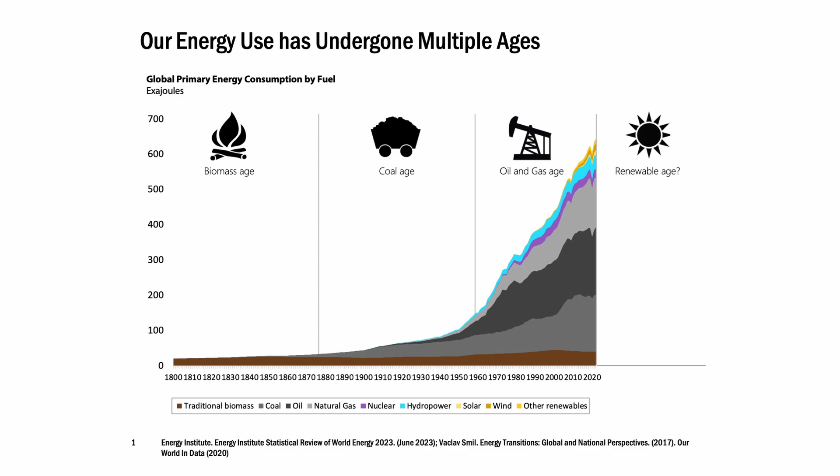So renewable energy resources, they make up a relatively small portion of our energy mix today, but they are the fastest growing. As you can see here, our global energy mix has gone through several phases, from biomass energy to coal to one dominated by oil and gas, and many believe that renewable energy is going to be the next energy age that we'll enter into, where renewable energy dominates our energy resource mix.

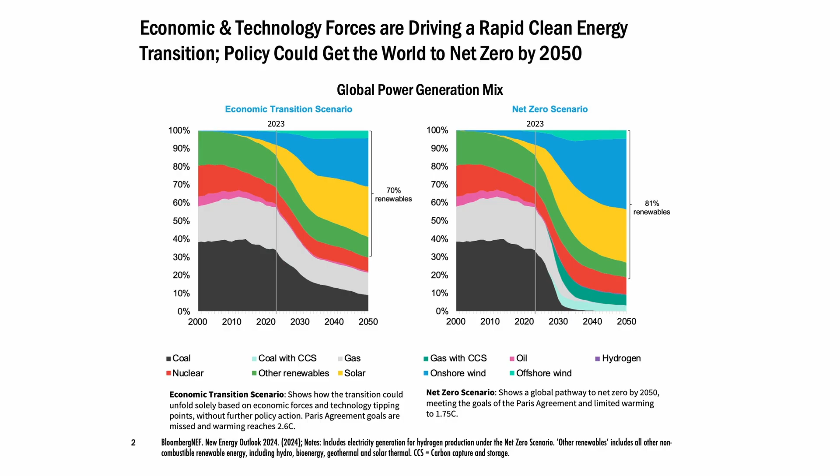This shows some global electricity forecasts from Bloomberg New Energy Finance, which is a reputable source, showing two different scenarios: a more conservative economic transition scenario and a net zero scenario, both of which you see really steep curves of renewable electricity adoption, again dominating our electricity and energy mix going forward.

So in this class today, we're first going to talk about what renewable energy is and what role it plays in our energy mix. And then we're going to walk through the renewable energy project development lifecycle. And in that process, you'll learn about the different technical and permitting and regulatory challenges that renewable energy projects need to overcome in order to get built.

So we hear the term renewable energy a lot, but what does it actually mean? What do you guys think of when you hear the term renewable? If used sustainably, I like that. Yeah, we'll talk about why it's important to think of depletability in terms of a spectrum. Generally, renewable energy resources are less depletable than their fossil counterparts, but they can be depleted.

Limited OPEX costs, yeah. Most renewable energy resources, like we talked about, you don't have to pay the sun to shine or the wind to blow, right? So typically lower fuel costs, but they often do have higher gathering costs, right? Because many times they're more site-specific. So gathering and transmission can be more expensive.

Less impact on the environment, yeah. Generally, renewable energy resources score higher on the environmental scorecard than their fossil fuel counterparts, but again, that's not always the case. That's great. So renewable energy resources encompass a wide variety of resources that are actually very diverse and don't necessarily have a ton in common.

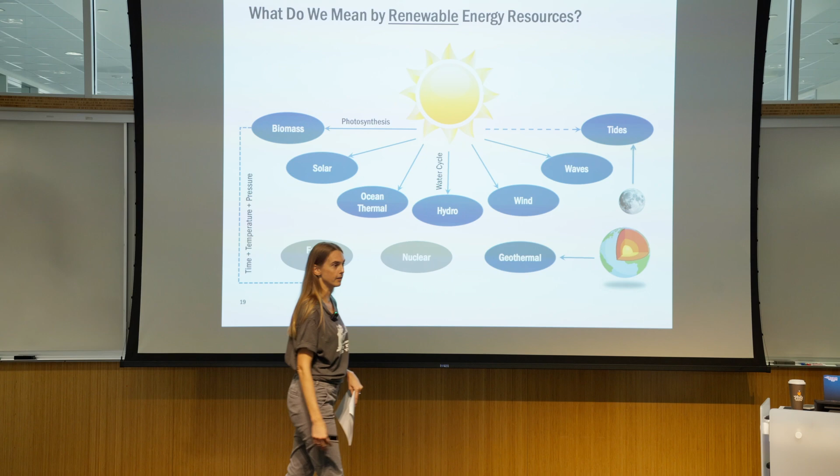Many think of renewable energy resources as non-depletable or inexhaustible, but as we talked about earlier, it's important to think about depletability in terms of a spectrum. Some of these renewable energy resources can be depleted faster than we can use them. So the lighter blue ones, hydro, geothermal, and biomass, are the resources that we would consider semi-depletable. For example, with traditional biomass, if you cut down a tree and burn it to generate heat, you can't use it again, right? And we have a limited biomass stock in the US and in the world.

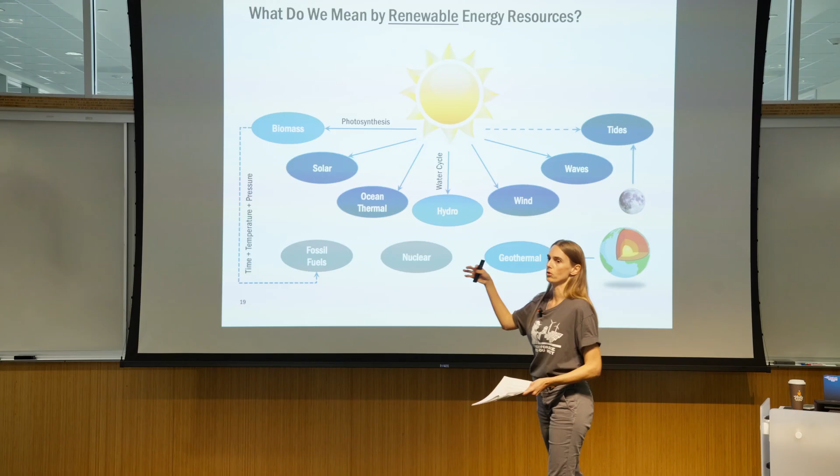Hydro can also be depleted. Once you take a water resource from up high and spin it through a turbine to generate electricity, that potential energy is gone, and you can't use it again unless you use energy to pump the water back up into the reservoir. Taking a step back, our hydroelectric resources can be depleted as a result of climate change, right, with the aridification of the Southwest and the Colorado River.

Geothermal energy, although heat from the Earth's core is not necessarily getting depleted, what is getting depleted is the heat transfer fluid that's bringing that heat from the Earth's core to the surface so that we can use it for electricity.

So water turning into steam and bringing that energy up. So that's one of the reasons why we see geothermal reservoirs' energy output depleting over time as that steam resource is getting depleted unless you actively replenish it. Then, of course, you've got the fully depletable resources in gray that take tens to hundreds of millions of years to form, and so are considered fully depletable on human timescales.

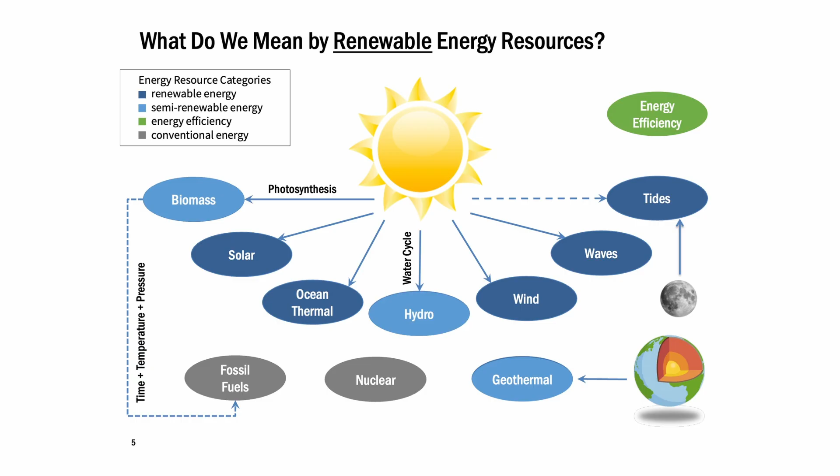The other energy resource, again, that we can't forget is energy efficiency, because the cleanest and the cheapest kilowatt hour or therm is the one that you don't use in the first place. But we often don't think about energy efficiency as a resource, right? But again, it is, in my opinion, the most valuable.

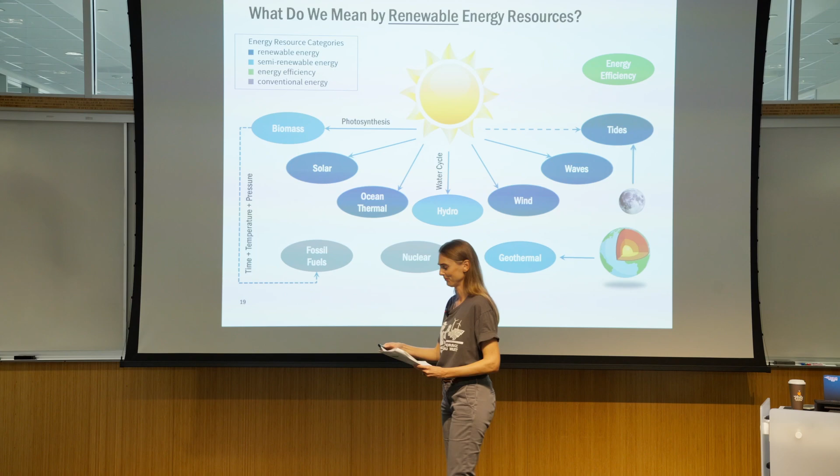In this course, we talk about three categories of renewable energy resources. The first is energy efficiency, which is a category in its own. Again, the cheapest and cleanest kilowatt hour or therm is the one you don't use in the first place. It's important to think about negawatts as a resource available to us.

The second category are the truly renewable energy resources, where use of those renewable energy resources doesn't deplete its source. So that's the wind, solar, and ocean resources. And then the third category are the semi-renewable energy resources, where if we don't manage use of those resources, we can actually deplete them. So that's hydro, geothermal, and biomass.

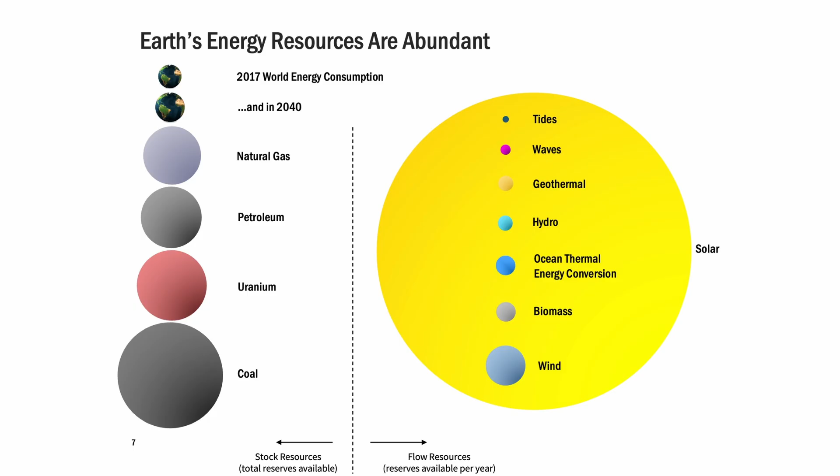I think in the US, the geothermal resource that's technically recoverable and available for us to harness is about 8% of our total electricity demand, whereas for the solar resource, that number is 75 times our total electricity demand. So huge variability there. And even though wind looks relatively small compared to solar, wind is more like 8 times our electricity demand. So still lots of potential wind resource available to harness that we haven't yet.

Our good old trusty LCOE chart shows us that there's also a lot of variability in terms of the cost of different renewable resources. Renewable energy makes up some of the cheapest electricity that we can build today, and some of the most expensive if you're talking about C&I or rooftop solar.

Renewable energy resources also have a commonality in that they can typically be more intermittent than other resources because they're dependent on the resource availability. So because of that, the costs that you see for renewable generation in the LCOE chart aren't necessarily reflective of the full costs for integrating those renewable energy resources into the grid. And those costs are kind of depicted, as you guys remember from the grid lecture, by the California ISO duck curve and the ramping needs of that curve.

And yet, because grid operators have a variety of different tools available to them to integrate renewable energy resources and balance supply and demand in real time, despite the challenges of those integrations, we have seen states integrate significant amounts of renewable electricity into their grid, upwards of 50% for states like Kansas, South Dakota, and Iowa that have a lot of wind electricity.

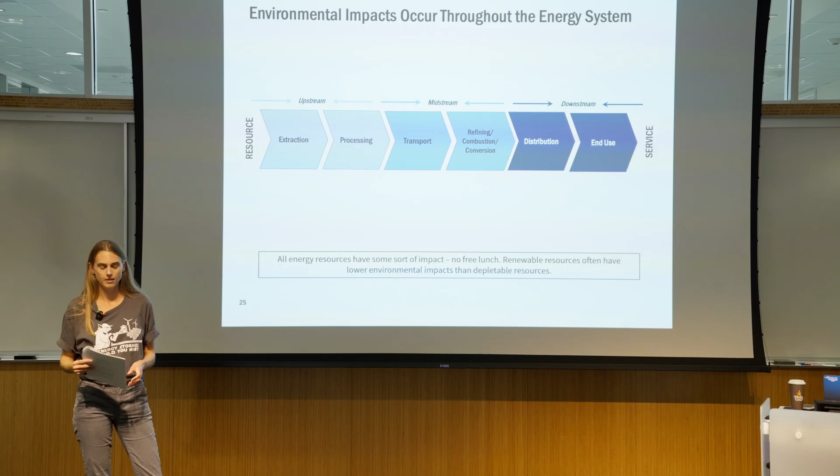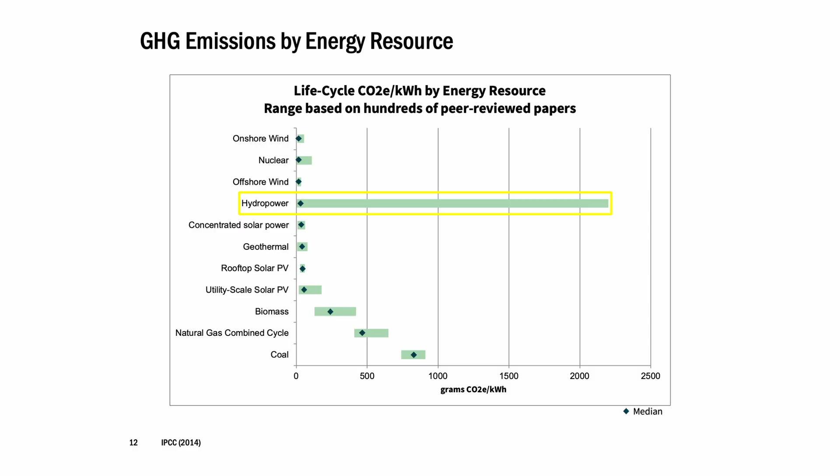Renewable energy resources also have a variety of different environmental impacts. They generally score better on the environmental scorecard. You've got the IPCC life cycle greenhouse gas emissions of different electricity generation resources here, where fossil fuels have relatively higher greenhouse gas emissions than their renewable energy counterparts. However, you've got biomass that can have pretty significant greenhouse gas emissions depending on the feedstock used, as well as hydropower that can have significant greenhouse gas emissions due to the flooding of reservoirs.

Again, you'll remember this from the environment lecture, but renewable energy resources make up some of the biggest water users, with geothermal, ethanol, and hydropower using the most water of any energy resource in the US.

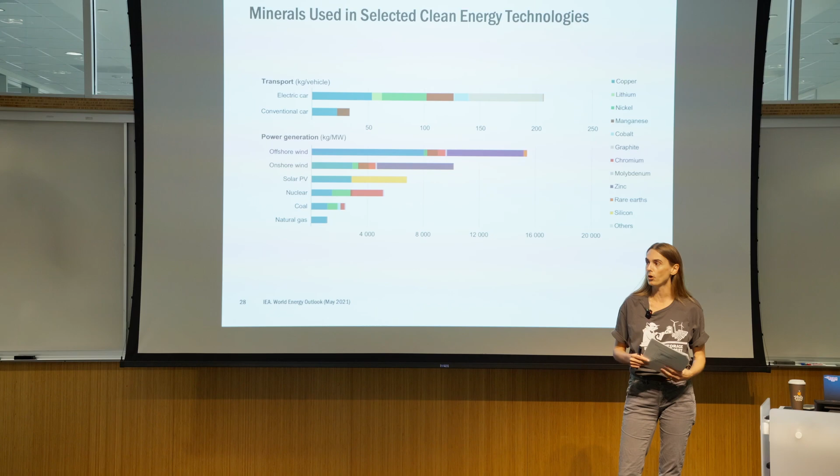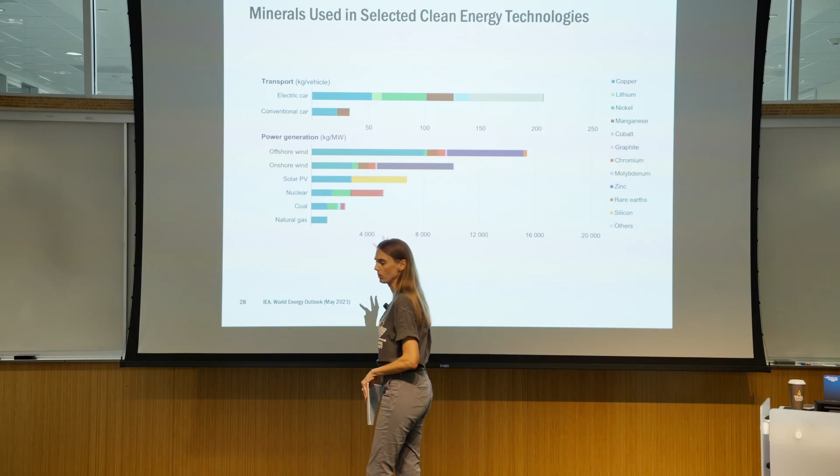And although clean energy technologies are less greenhouse gas intensive than their fossil fuel counterparts, they also typically use significantly more minerals, which require mining, and that mining process is fairly energy intensive, particularly for batteries, which, although they're not necessarily a renewable energy resource, are often paired with renewable energy resources to manage their intermittency. But at the end of the day, renewable energy resources are forecasted to make up a significant portion of our ability to solve climate change.

All right, so let's look at the role that renewable energy plays in our energy systems today. Renewable energy resources make up a relatively small portion of our energy mix, about 8 to 9% of our energy mix worldwide and in the US respectively, but a much bigger portion of our electricity mix, given that transportation currently doesn't make up a big portion of our electricity mix, and electricity is where the bulk of our renewable energy growth is happening.

And we know that the differential between the electricity mix and the energy mix is going to get reduced as we continue to electrify the transportation sector. So globally, traditional biomass is actually the biggest quote-unquote renewable energy resource that we use today, making up almost 7% of global energy consumption. And this is largely because in the developing world, biomass for cook stoves and heating is still used by about a third of the world.

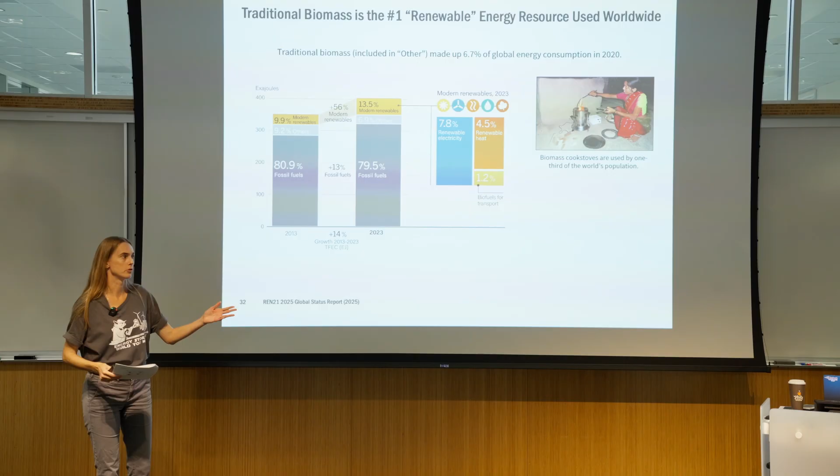But we don't always necessarily consider this a renewable energy resource because it's super dirty, it's bad for health, a huge driver of deaths as well in the developing world. And it's also hard to measure. So you don't always see traditional biomass measured in a lot of the charts that we show. It's shown in this REN21 chart here. It's included in the other category, which distinguishes it from the modern renewables.

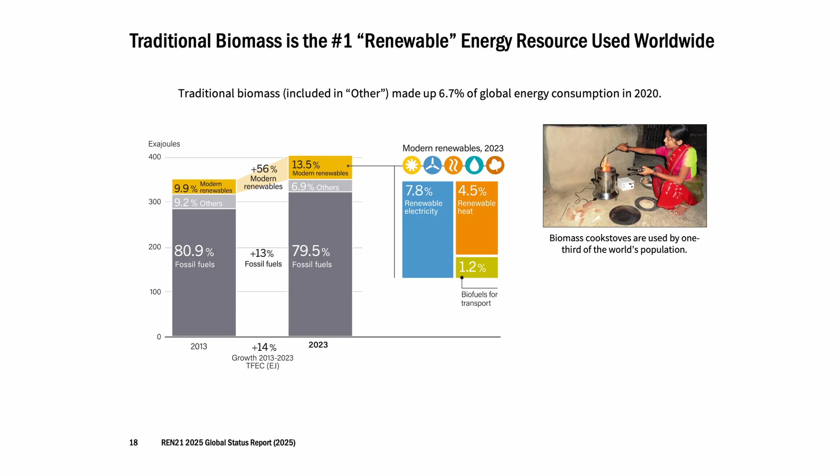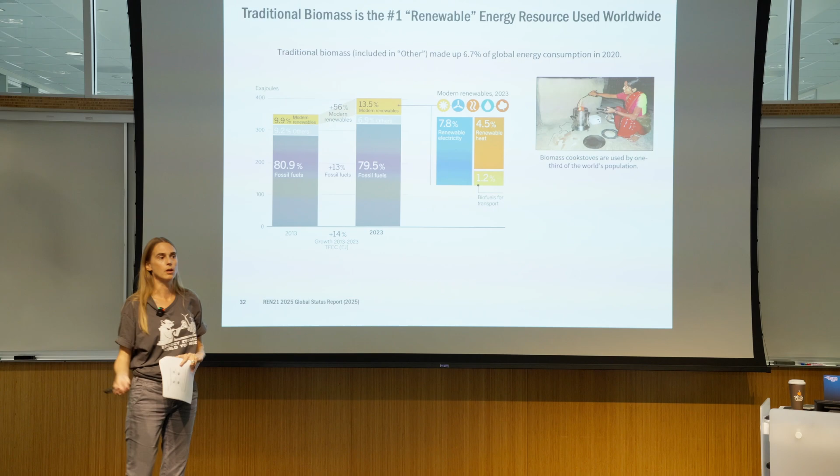But traditional biomass, I don't believe, shows up in our energy charts typically up here. But it is technically the largest renewable energy resource that we use today, and something you'll probably learn more about in the Developing World lecture. So even though renewable energy is still a relatively small portion of our energy mix today, it is the fastest growing, with wind and solar, which is what's driving the growth in other renewables here, making up the fastest electricity or energy resources from a growth standpoint.

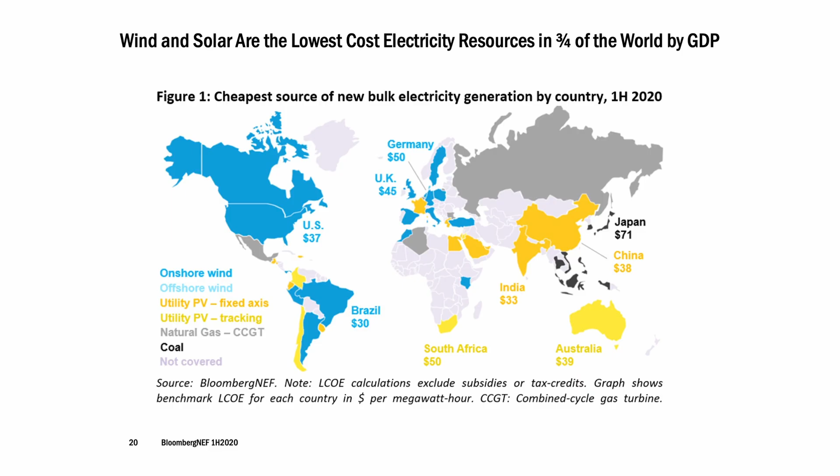And that growth is really being driven by those competitive economics of wind and solar. You saw in the Lazard LCOE chart that wind and solar, at least at the utility scale, are the cheapest electricity resources that we can build today. Those Lazard data, that's US specific, but we see that in other countries across the world as well, where wind and solar are the cheapest electricity resources that can be built in those grids and markets.

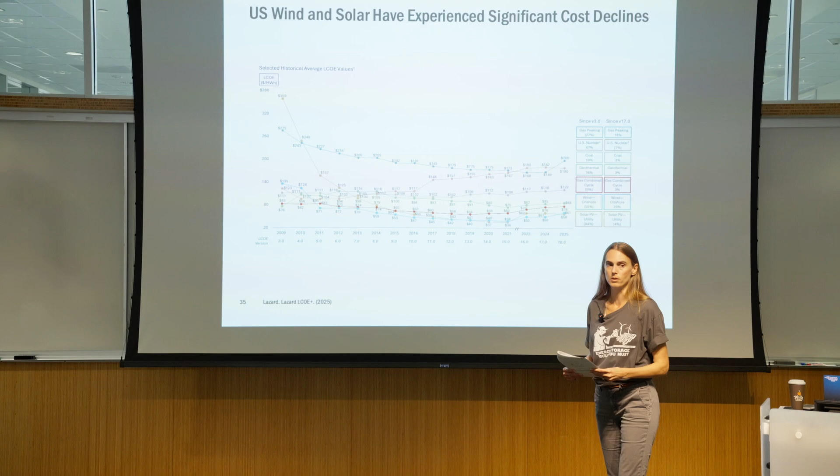And those economics are a relatively recent phenomenon, where wind and solar weren't always necessarily the lowest cost resources, but thanks to the fact that they're fundamentally technologies where innovation can help drive down the costs, as well as manufacturing scale, the result is that we've seen wind and solar costs come down significantly to be the lowest cost electricity resources. And meanwhile, nuclear costs have been going up because of primarily increasing safety regulations in the US, and you see volatility in natural gas pricing as well, driven by the volatility in natural gas prices.

Okay, and because of these fundamental economics, that's why we've seen significant private investments focusing on renewable energy resources, wind and solar, and battery energy storage, among others, to the point where investments in the clean energy sector are starting to rival global investments in fossil fuels. So a pretty significant transition that our world is undergoing today.

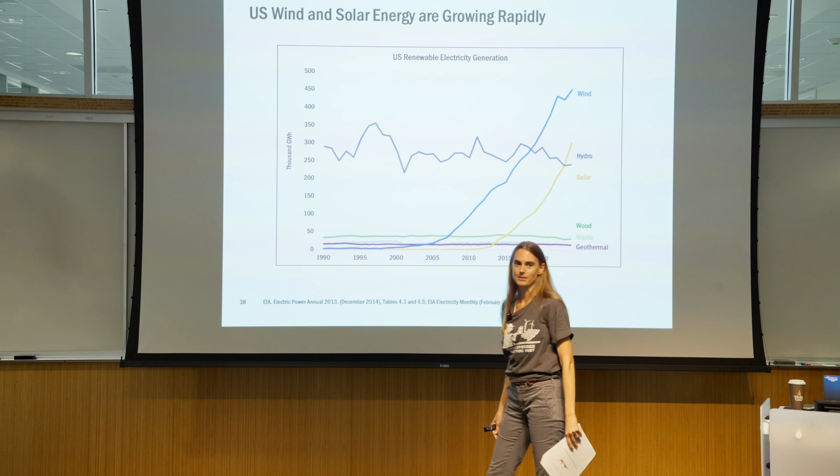Bizarre weather patterns, exactly. So the wind resource is driven by temperature differentials, right? And so if we have climate change and rising temperatures and the entire world is more hot, you've got less wind resources. And that's what happened 2 years ago, and why we see that decline.

All right, so the growth in renewable energy resources on our grid is also what's driving the push for electrification of everything, right? Because if we can electrify transportation, if we can switch from natural gas in our homes to electricity, that allows us to take more advantage of those renewable energy resources.

Last but not least, I want to remind you all of the importance of energy efficiency resources and the fact that they can play a really big role in reducing our energy usage and reducing our carbon intensity as well. We often see those up-and-to-the-right curves with solar and wind, but we've got up-and-to-the-right curves with energy efficiency too. We just don't always see them because negawatts aren't always measured.

Energy efficiency has the potential to significantly reduce energy usage in different sectors, whether you're talking about transportation and the fact that we've got all these systems with lots of inefficiencies. A significant portion of the fuel in our vehicles, for example, isn't actually used to move the person in the vehicle—it's meant to move the vehicle itself.

Or electricity end uses, like transitioning from incandescent to an LED light bulb, that can have a 12x payback in a 10-year period, which is a really great investment return if you're an investor.

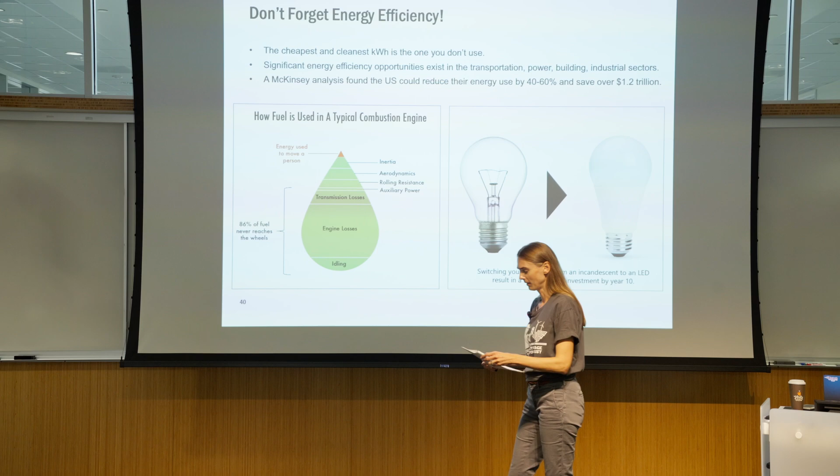Okay, so let's talk about renewable energy project development. This is a bird's eye view of the three main steps in a renewable energy project development life cycle. You've got the development phase, which can take quite a long time—if it's one year you're lucky, but typically it's more like 5 to 10 years.

You've got the construction phase, also known as engineering, procurement, and construction, or EPC, which might take 12 months depending on what type of project it is—wind or solar—and how big it is. And then you've got operations and maintenance, which can last for 30 or more years.

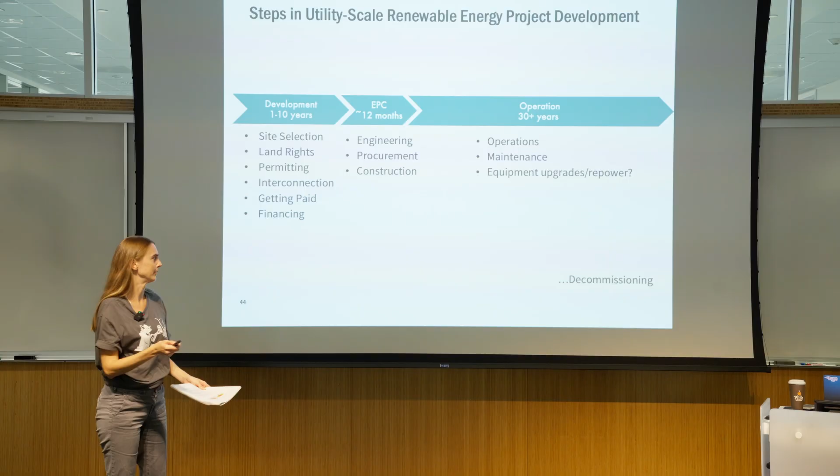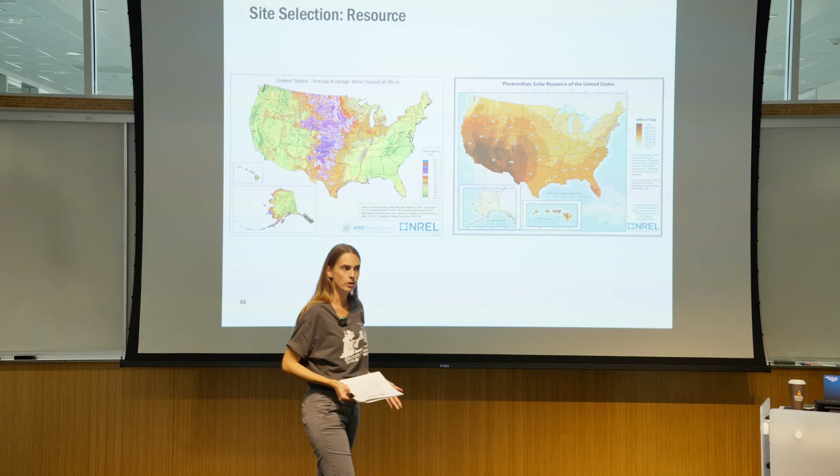All right, so you obviously want to go where the resource is highest if possible. Wind energy is much more resource-specific than the solar energy resource—you've got a lot of wind energy in the Midwest and the Great Plains, where you see the purple here. That's where most wind energy project development is concentrated in the US, but there are also great pockets of wind resources, like in the Altamont Pass, where you've got the temperature differential between the Bay and Central California, and the mountains basically funneling the wind through those passes.

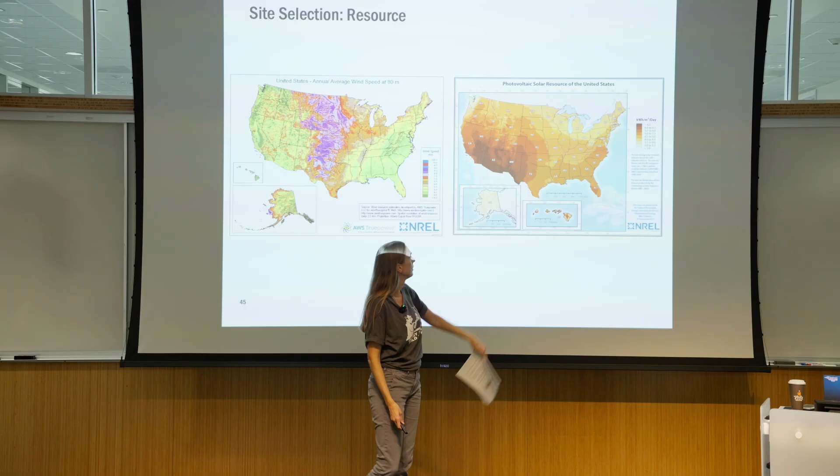With solar, certainly a lot of the early solar development happened in the Southwest where the greatest resource is, but the technology has improved to the point where the solar energy resource is economically viable pretty much everywhere, even in the Northeast, in Maine, and in Washington and Alaska. So much less resource constrained for solar than for wind.

As we talked about, you also have to worry about environmental impacts, because those probably mean much greater permitting and regulatory hurdles to get through. This shows a map where NREL estimates the technically recoverable wind resource, and this shows the exclusions from that—whether public lands, water, urban areas, or other sensitive environmental lands like national parks. The Nature Conservancy has a map called the Site Renewables Right map, where they've mapped out bird migratory patterns and sage grouse habitat to help developers and other decision makers understand where not to develop wind energy resources.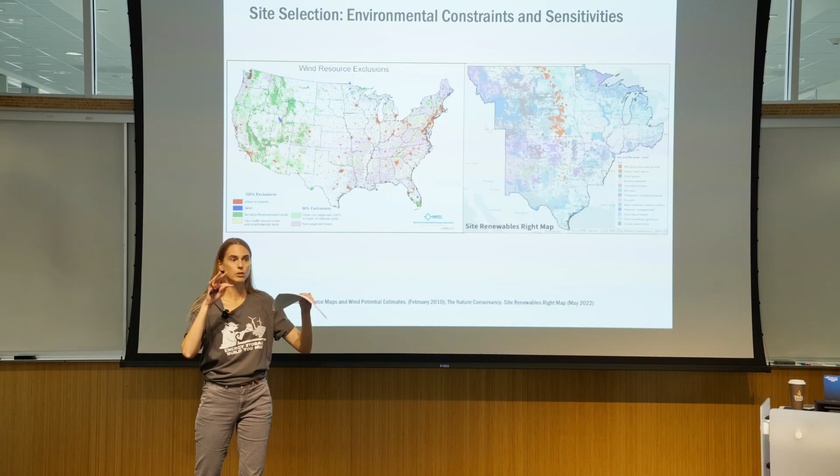This is pretty significant. If you go to NextEra's wind project in the Altamont Pass or in Solano County, they'll talk about how they have biologists on staff to help mitigate the impact of the wind turbines on birds.

You also want to go, as we talked about, where grid capacity is available for you to plug into the grid. You can either do that by identifying existing transmission capacity that's not fully utilized, monitor where utilities and others are making investments in new transmission capacity, or target where a large power plant—maybe it's old or uneconomic—is about to retire, and take advantage of that transmission capacity that opens up.

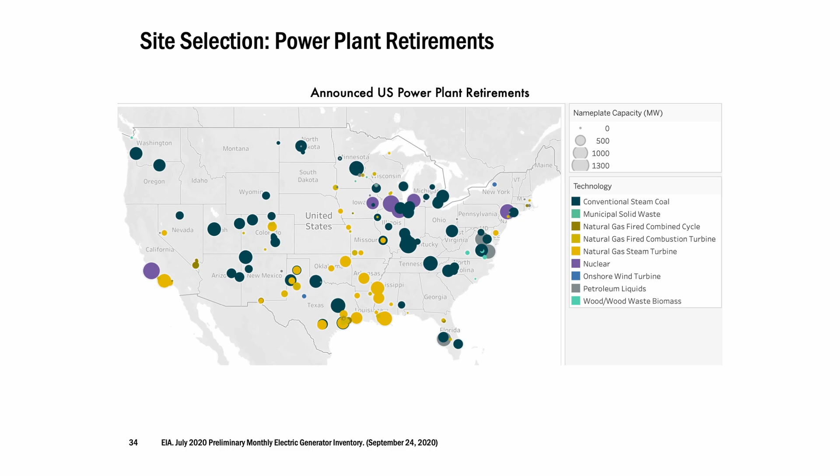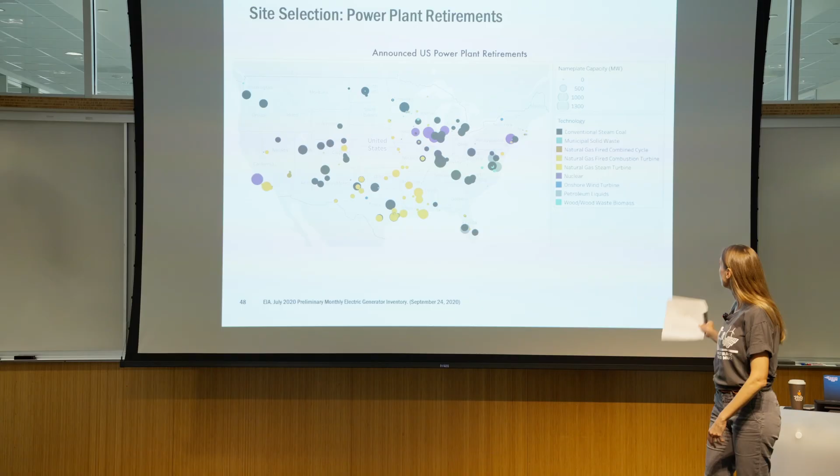This shows a map of a lot of the retirements happening in the US, most of which are coal-fired power plants, as well as some large nuclear power plants, some of which have gotten saved in the past couple of years. But also you have a lot of older and inefficient natural gas plants, like combustion turbines, that are also retiring and opening up that transmission capacity.

You also want to go where you can get good prices. Not a lot of new wind capacity is going into West Texas anymore, because the economics are unfavorable. So you want to make sure that the locational marginal price you're going to get for your electricity as you feed it into the grid is favorable both today and as forecast into the future.

Another big consideration in site selection that impacts who you can sell your power to is whether or not you're in an ISO or RTO region. If you are, you can sell into wholesale electricity markets and then enter into a PPA with Stanford, or whoever, or the utility. But if you're not in an ISO or RTO region, your only customer is the utility, so you would only really build there if you knew the utility wanted to buy your power.

But early on in the renewable energy project development timeline, a lot of renewable energy development was concentrated in these ISOs and RTOs for that reason, because as we talked about in the grid lecture, that allowed competition with vertically integrated utility assets. Whereas outside of those regions, utilities didn't want to see that competition with their assets because it would reduce their revenue to recover their costs.

You also want to go where there's growing load, whether because of population growth or new data centers or manufacturing demand coming online. Another consideration is whether there are favorable renewable energy policies where you're building your project. A key policy in that respect is renewable portfolio standards, or RPSs, which are state-level targets for how much renewable electricity the state wants generated or supplied on their grid.

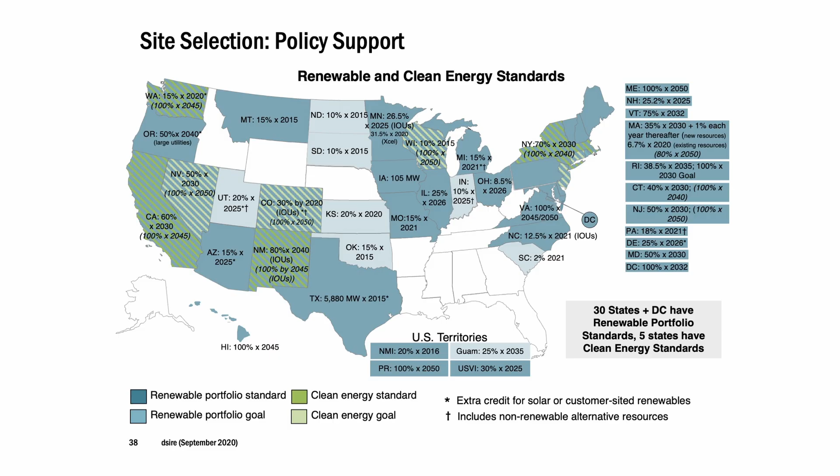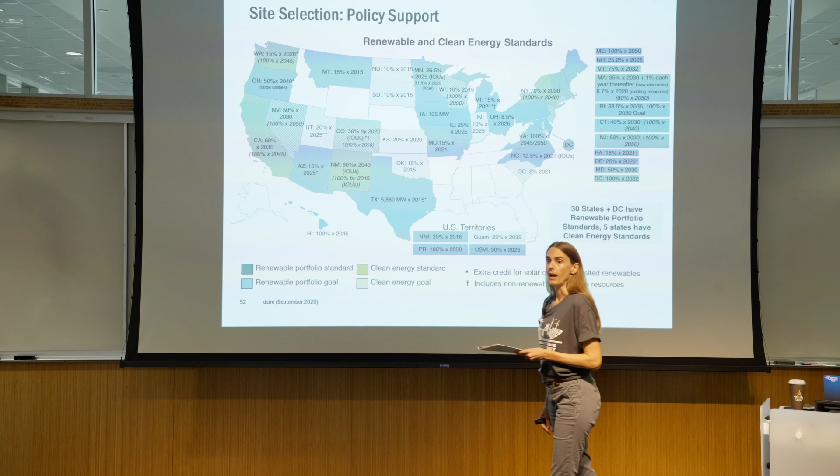It's based on supply typically, and some states cap how much can be imported from out of state, including California. It also varies for what resources qualify. For example, in California, getting to the 60% renewable energy by 2030 target, hydro can't be used because of the environmental impacts of hydro. However, going to 100% clean energy by 2045, California allows hydro to be counted, as well as nuclear and net zero natural gas paired with carbon capture. But at the end of the day, there are lots of aggressive renewable energy targets helping to drive renewable energy growth in these different states.

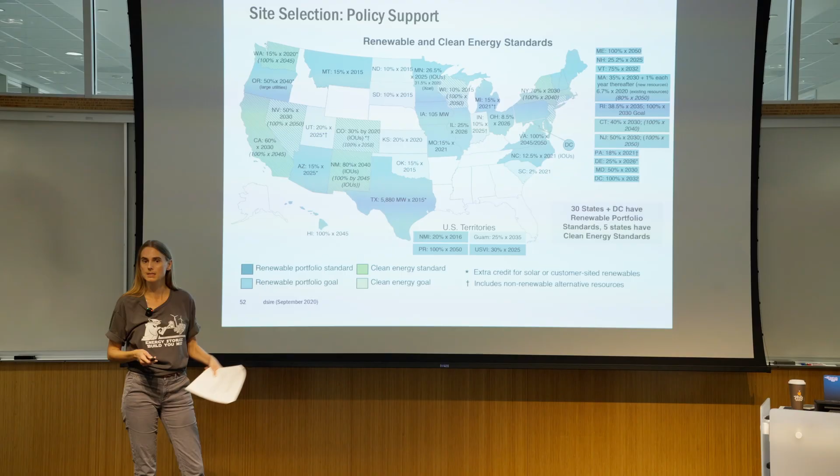For wind and solar, wind requires a lot of land, but you're only using a small portion of that for the turbines and the ancillary electricity generation equipment itself. So typically what we see for wind projects is they don't own the land outright, since it can be dual use for things like growing crops and livestock. So a wind project developer will just lease the portion of the land they need for the wind turbines, and that way a farmer or whoever else can continue to own the land and use it for other purposes.

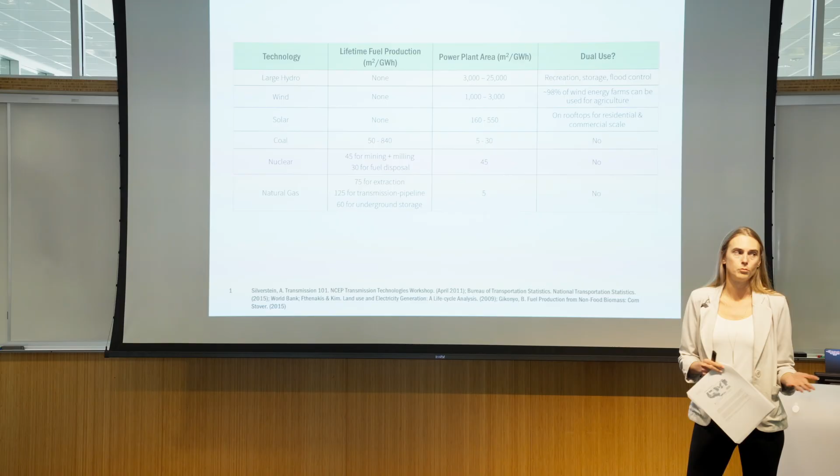For solar, it's a little bit different. In most instances for a utility scale project, you can't use that land for anything else. We do see some limited instances of agrivoltaics, where you're growing low light crops underneath solar panels, but those are pretty limited. So most of the time you can't really use the land for something else. The solar project developer might own the land if it makes sense economically and from a tax standpoint, or they could lease it from the owner if it's on a parcel of a bigger swath of land being used for other things.

So after tying up the land, you have to worry about permitting. Any business needs to get permits in order to operate, either at the local, state, or federal level. Those permits might vary depending on the project type, size, and location, and they could pertain to anything from environmental impact permits to land use to Federal Aviation Administration permits. Pretty much every single wind turbine above a certain height needs to get FAA permits to operate, because the FAA doesn't want it to interfere with radar or flight patterns. Let's talk about environmental permitting.

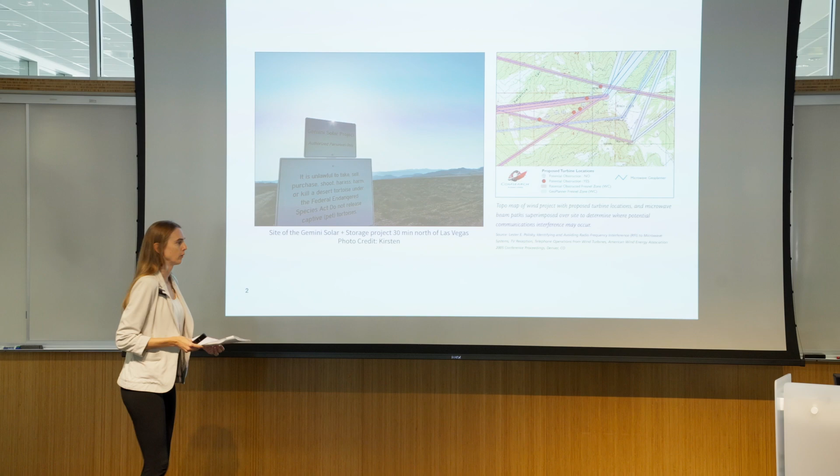This is really significant and can be a point at which many projects fail. A great example is the concentrating solar power plant in the Mojave Desert called Ivanpah. It was built in 2014, and during construction in 2010, construction actually had to stop because the U.S. Fish and Wildlife Service found a bunch of endangered desert tortoises where they were building this project. U.S. Fish and Wildlife had to come in, do studies, and make recommendations on how the project needed to mitigate its impact on these endangered desert tortoises. Ultimately, the project had to spend about $60 million, I think 3% of the total budget, on relocating these desert tortoises. Pretty significant. And at the end of the day, they had to reduce the project size to mitigate the impact on these desert tortoises.

So again, going back to site selection, consideration of things like environmental and wildlife sensitivities are really important when you're selecting your site, or thinking about different types of technologies. I know over time we've seen new types of piling technologies. Piling is when you're driving a steel structure that holds the panels into the ground. We've seen different piling techniques and technologies that reduce the environmental impact on the surrounding land and desert tortoises.

Another big consideration for permitting: if you're building on federal lands, it takes a really long time to get permits from the Department of Interior and the Bureau of Land Management.

Especially now, because I think it was just a few months ago that the Department of Interior announced that they weren't going to be permitting wind and solar projects anymore. And we've already seen the impacts of that with a pretty large solar project in Esmeralda County in Nevada that got canceled because they couldn't get their permit approved to build the project. And this was after years of development.

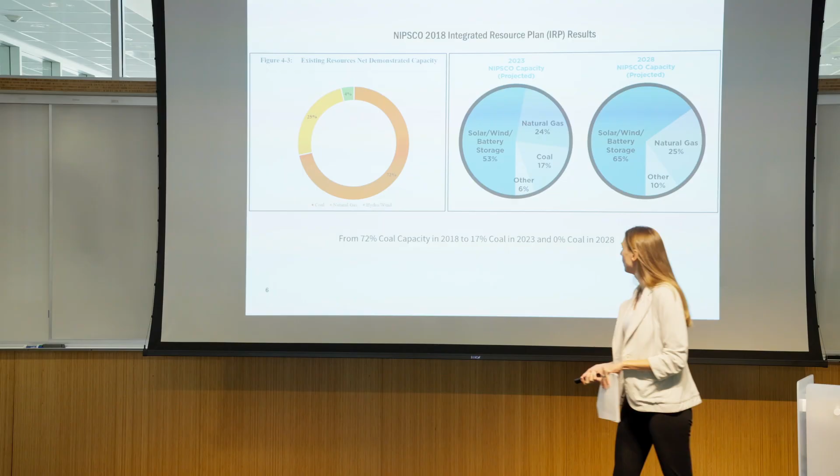So one customer, obviously, in a region could be the utility. And as we talked about in the grid lecture, one way to gauge whether or not a utility has appetite to buy your project is to look at their integrated resource plans, which are their long-term plans—could be 5, 10, 20-year plans—that define what kind of projects they want to build or source.

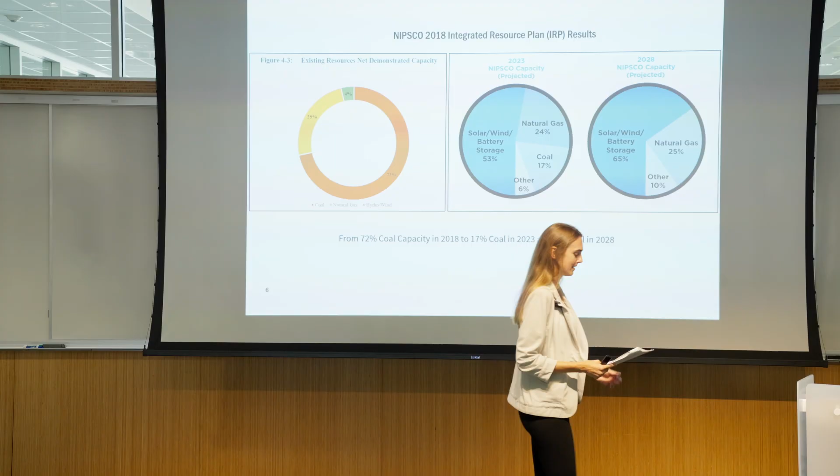So if you're selling to a utility, if you're developing a project, that utility might buy the project from you once it reaches certain development milestones, or the utility can enter into a long-term power purchase agreement with the project, where that project continues to be owned by an independent power producer.

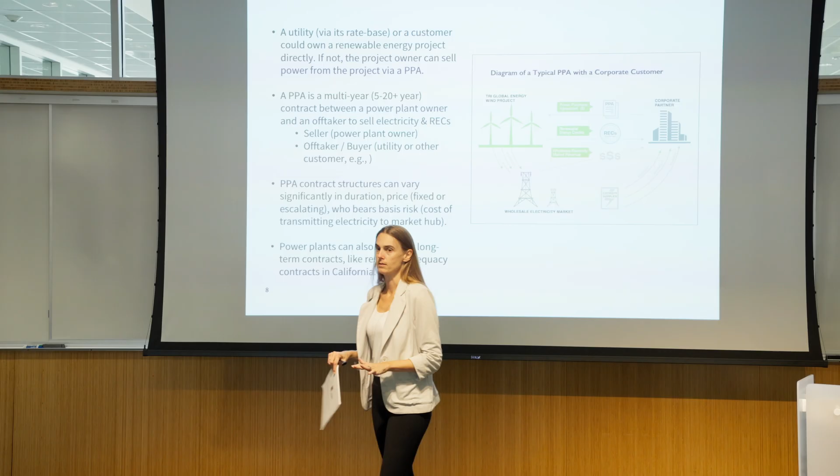So we talked about long-term PPAs and the fact that they're both physical and virtual PPAs, and the corporate buyer too might enter into a PPA. We've seen instances, like with Apple, where they actually purchase and operate the project themselves. But most of the time with corporate procurements, it's through long-term power purchase agreements where the project is owned by somebody else.

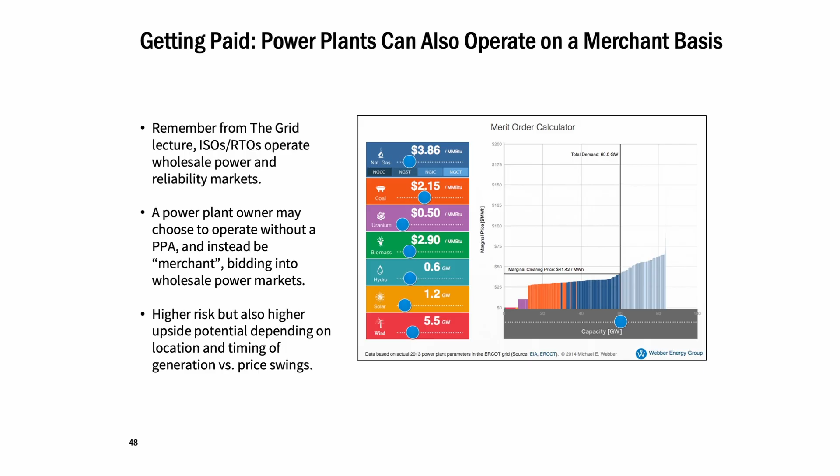If you don't have a PPA in place, or a particular customer you're selling to, you could just sell into the wholesale power markets if you're located in an ISO or RTO region, which creates a little bit more uncertainty around the price you're going to receive for your power, because you don't have a price locked in as you would through a power purchase agreement. But it could also create some upside too. If you have some battery energy storage built along with your wind and solar project, it allows you to dispatch and take advantage of price arbitrage opportunities as prices vary over time in these wholesale power markets.

We don't see this too often, especially because, let's say you're located in West Texas and you built a wind project 10 years ago. If you operated as a merchant power plant, without a PPA, solely selling into these wholesale power markets, you'd be taking negative pricing right now.

Another way that projects get paid are through what are called renewable energy certificates, or renewable energy credits, or RECs. Taking a step back, the electricity generated by a renewable energy project has two components. One is just the generic electricity being generated - electricity is electricity. The other is the renewable energy attributes of that electricity. These two components are valued and can be sold separately. So if I'm a wind project, I can sell my electricity into the wholesale power market and get a price per megawatt hour for that electricity, and I can separately have a contract for someone to buy the renewable energy attributes of that electricity.

The bulk of demand for REC purchases is driven by the renewable portfolio standards I talked about on Monday, where, if I'm a utility or an independent power producer and I have to comply with pretty aggressive renewable electricity procurement targets imposed by my state, I could either retire a natural gas power plant and replace it with wind and solar, or I could keep my natural gas power plant online and buy renewable energy certificates from another project built by somebody else in order to comply with that RPS.

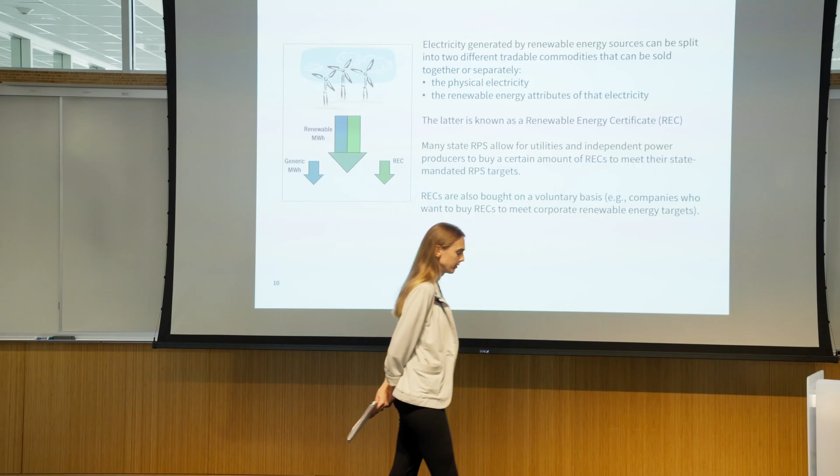Is there an agency that certifies the renewable energy certificates to make sure there are no copies being handed out by other companies? WREGIS is the one in the West, where if you want to qualify for formal RPS compliance, you have to register with this entity. I think it's either nonprofit or governmental, I can't recall exactly which. Then, in addition, there are nonprofits that also have certified RECs, like Green-e certification, that creates another level of certainty around the additionality of the RECs. I forget the names of the WREGIS equivalents across the nation, but they do operate regionally. So that's kind of getting paid.

And let's talk about financing. Financing is pretty cookie cutter for utility scale solar and wind projects these days. You need a combination of debt, sponsor equity, and also tax equity if you're going to take advantage of tax credits. So I'm going to mostly talk about tax credits with regards to financing, because this is the thing that's increasingly not cookie cutter, and HR 1, passed earlier this year, kind of put a wrench in it as well.

So tax credits: there are renewable clean electricity tax credits in the form of a production tax credit or an investment tax credit available for wind and solar projects, but also for biomass projects, geothermal projects, and battery energy storage as well. And these tax credits have a pretty significant impact on the economics of renewable energy projects. Most of the time when we show you the LCOE charts, we show you unsubsidized, but the LCOE report also shows the impact of those tax credits on the LCOE.

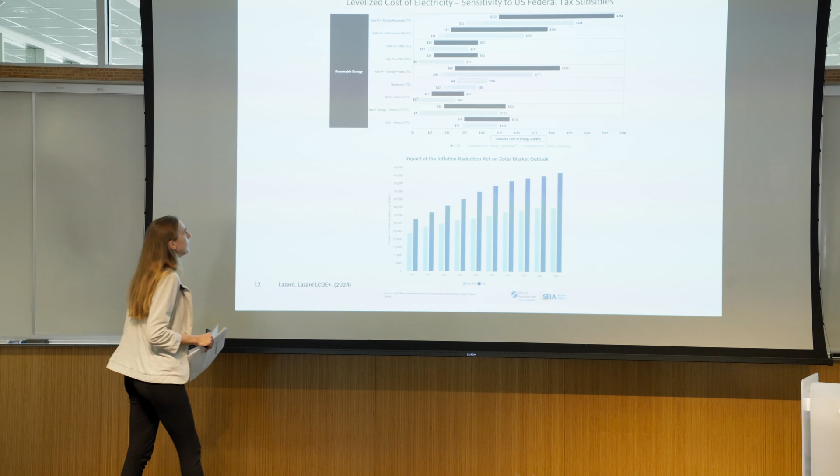And the result of the tax credits is that they drive additional deployment, right? We need to accelerate deployment of wind and solar in order to continue to live safely on this planet. So the objective of keeping the tax credits in place, even though LCOEs are really competitive, is to help increase deployment of these renewable energy resources.

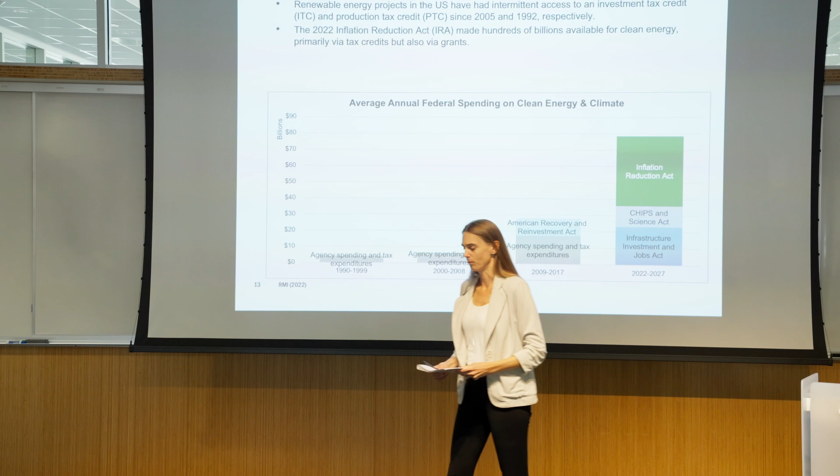Renewable energy projects in the US have benefited from some form of tax credit, an investment tax credit or a production tax credit, for years. In the case of wind, since 1992, and in the case of solar, since 2005. Just in the same way that the oil and gas industry has benefited from tax code related deductions and tax credits for decades.

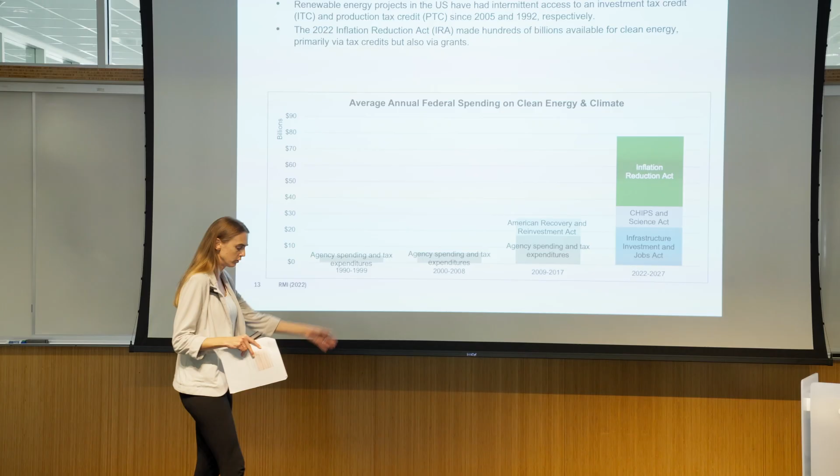And these tax credits have been really intermittent. I think the production tax credit, which was originally designed for wind, has expired or lapsed probably something like 8 or 9 times since 1992, which creates a lot of whiplash for the industry, right? And that's one of the reasons why, when you look at annual installations of wind and solar, you see a little bit of jerkiness.

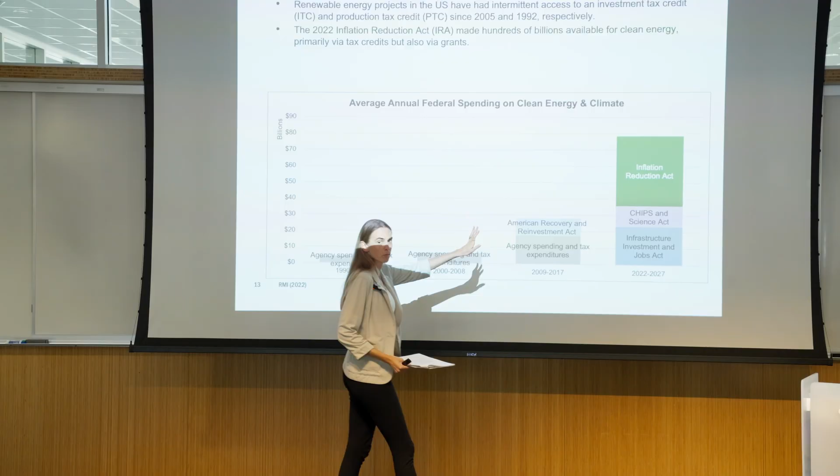So we thought that the production tax credit and the investment tax credit were going to expire in 2022, but the Inflation Reduction Act extended those tax credits and also increased them and made them available to more renewable energy resources. Tax credits were slated to make up about 75% of the Inflation Reduction Act funds that were going to flow towards clean energy. So of the hundreds of billions of dollars anticipated to flow to clean energy from the Inflation Reduction Act, 75% from tax credits. So pretty significant.

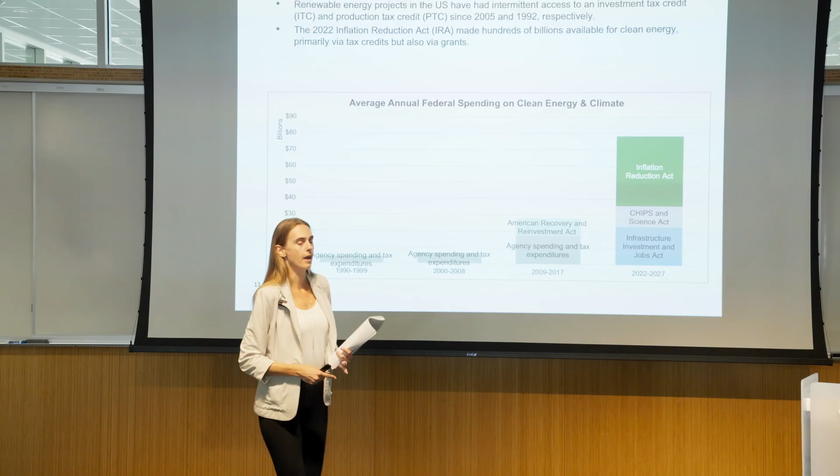Wind and solar tax credits, geothermal, et cetera, were a big portion of that, but we also had residential tax credits for energy efficiency. We had tax credits for domestic battery manufacturing. While wind and solar tax credits were a big part, they're not the only part.

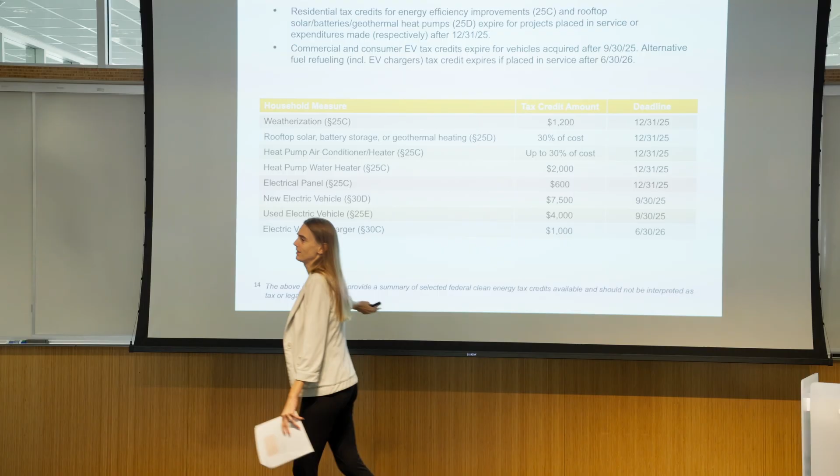So HR 1, the budget reconciliation bill, passed July 4th of this year. Again, it changed those tax credits, and it ended up phasing out and/or accelerating the retirement of many of them, including most of the tax credits that are available to households. So you can see here the new deadlines that have been put in place because of HR 1, many of which are ending by the end of this year. So if you or anyone you know is interested in getting a heat pump or a rooftop solar project, you definitely want to do it by the end of the year.

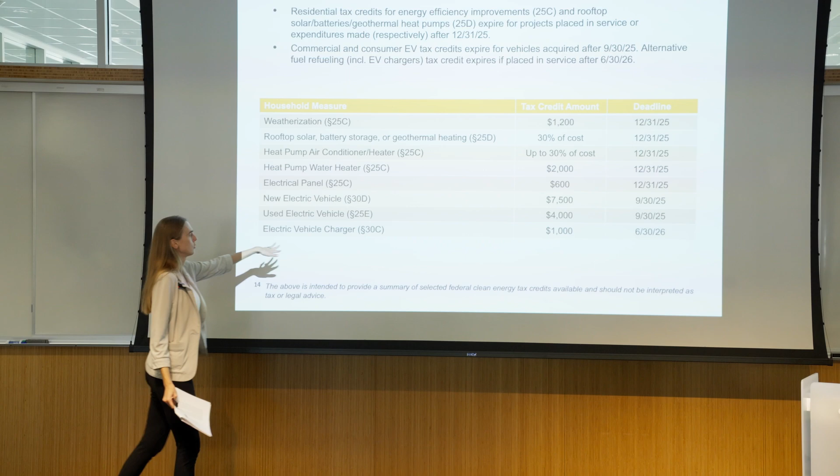The electric vehicle tax credits actually expired September 30th, and the EV charger tax credit that's available both to residents and to commercial customers that live in low-income census tracts is going to expire June 30th, 2026.

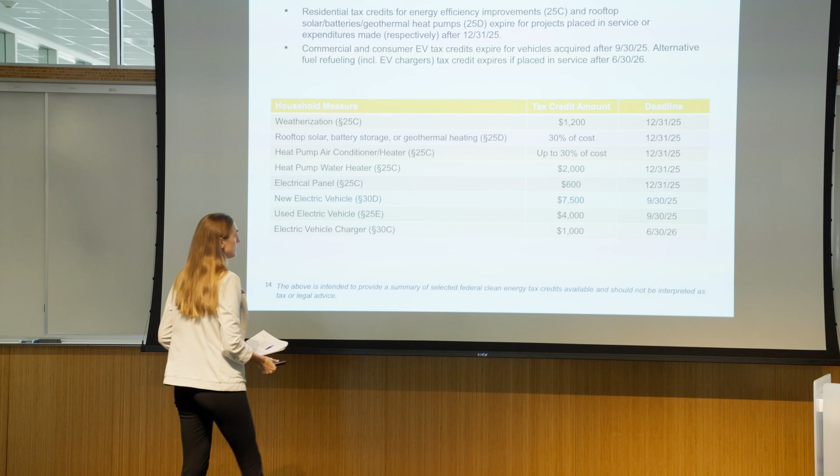And sorry, one thing that I'll say about tax credits for households in particular: a barrier to taking advantage of tax credits is going to be whether or not you have taxable income to offset with these tax credits, right? Because the way that it works is you build the project, and then after you build the project, you file a particular form on your annual tax filing, and you get a reduction in your taxes due by the amount of the tax credit. So if you don't have taxable income, say you're a low-income household, then these tax credits are hard to take advantage of.

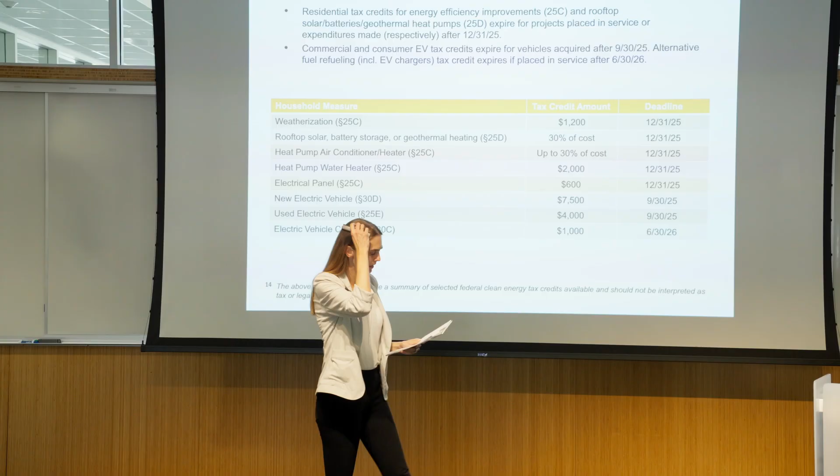One way to overcome that could be through a leasing structure, though. Say where a third-party commercial entity owns the project, monetizes the tax credit for the household, and leases the project to the household. All right, so that was household tax credits.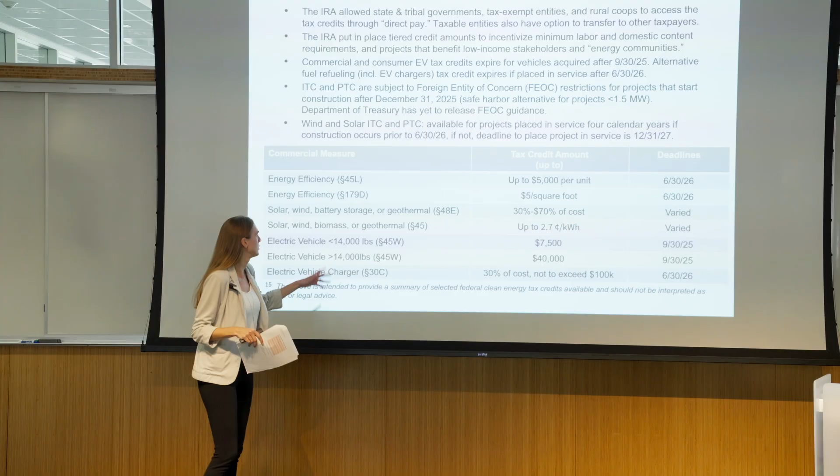Again, they need tax liability to take advantage of it, which means that if you don't have tax liability, you really have three options. The first is you bring in a tax equity investor, typically a large bank that has taxable income, but they're not going to want to do any projects below like $50 million, or $100 million. So that makes it particularly challenging for some of the smaller projects that don't have a tax liability.

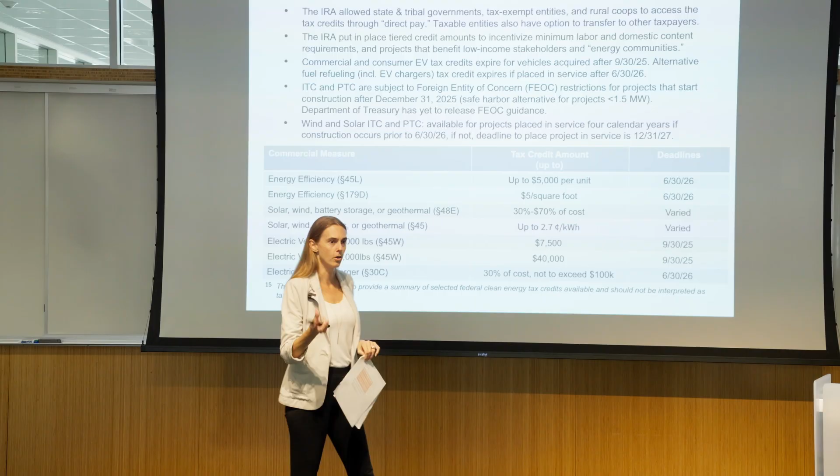The IRA made it possible for projects to, rather than do all the complex accounting and financial structuring of bringing in a tax equity investor, they enabled tax credits to just be sold directly through a mechanism called transferability. And there's actually a Stanford alum who started a company, Crux, that is a marketplace for these tax credits. He used to work at Treasury, so he saw the opportunity there and developed this company. So you can sell your tax credits directly via transferability.

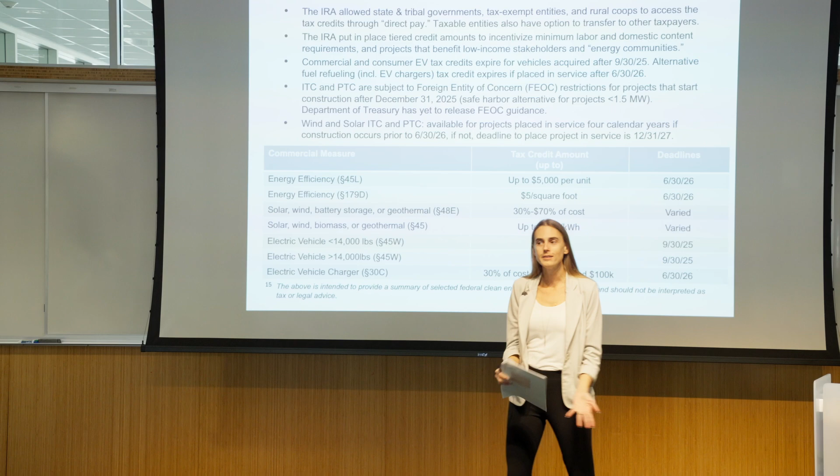And the other thing that the IRA did is if you're a non-taxable entity like a local government or a nonprofit, rural co-op, or a tribe, it instituted a mechanism called direct pay, where that nonprofit can file with the IRS and get a cash payment in the amount of the tax credit. So IRA did a lot of great things with the tax credits.

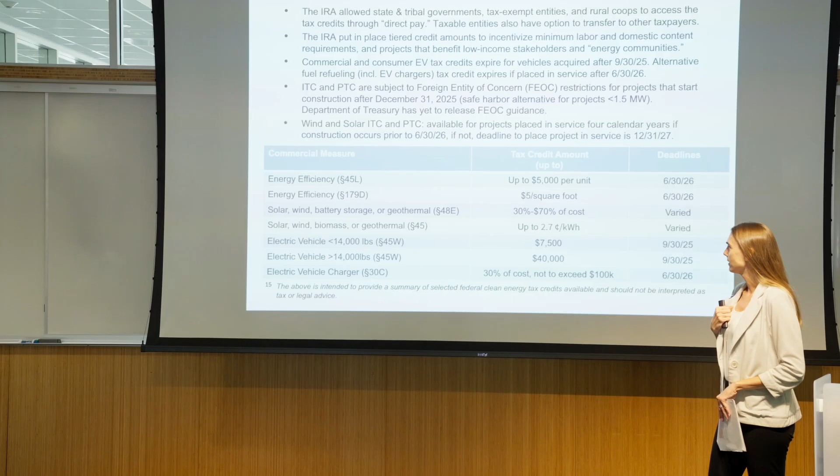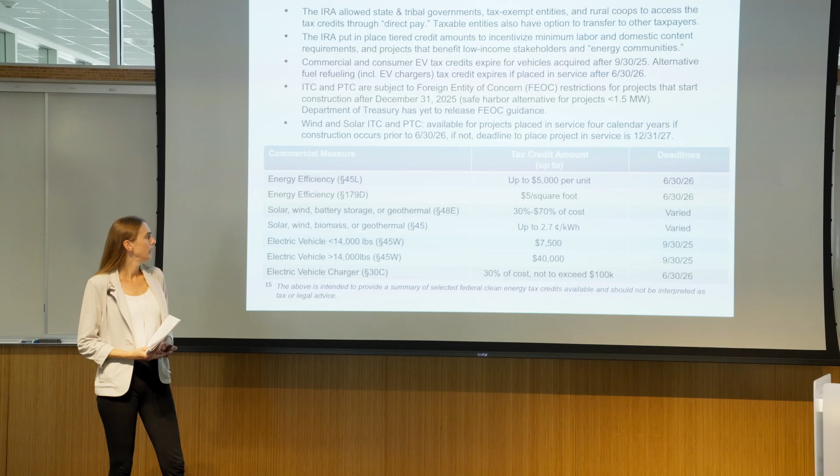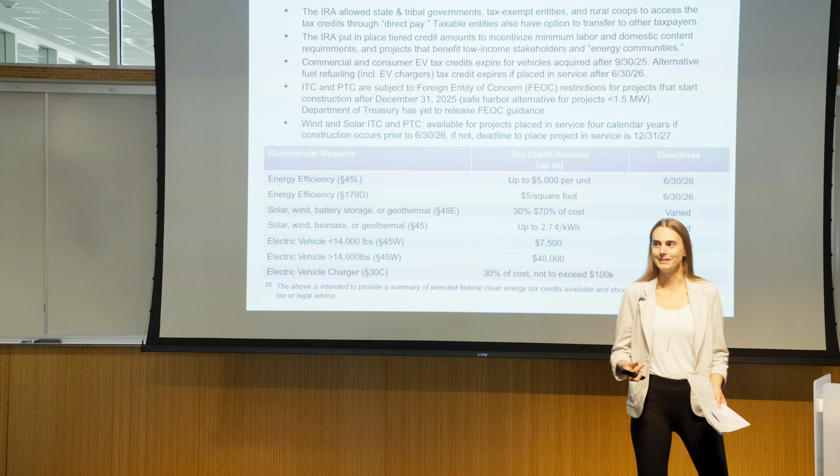And in addition, HR 1 changed those tax credits and accelerated when they're going to retire. The 48E and 45Y tax credits for wind, solar, biomass, geothermal, battery projects were changed. Basically, at the end of this year, some restrictive foreign entity of concern requirements come into place that are pretty prohibitive. And the IRS hasn't even come out with their guidance yet on the FEOC requirements, and they're probably not going to anytime soon because of the shutdown. So you can imagine there's a lot of uncertainty if you're building a wind and solar project right now.

And as you can see here, the wind and solar ITC and PTC in particular were targeted. It was originally meant to phase out in 2035. But now you have to start construction by June 30th, 2026 in order to qualify. And after that, it retires. You do have 4 years if you do prove a start of construction to place it in service. So that's why we'll continue to see projects take advantage of these tax credits for some time.

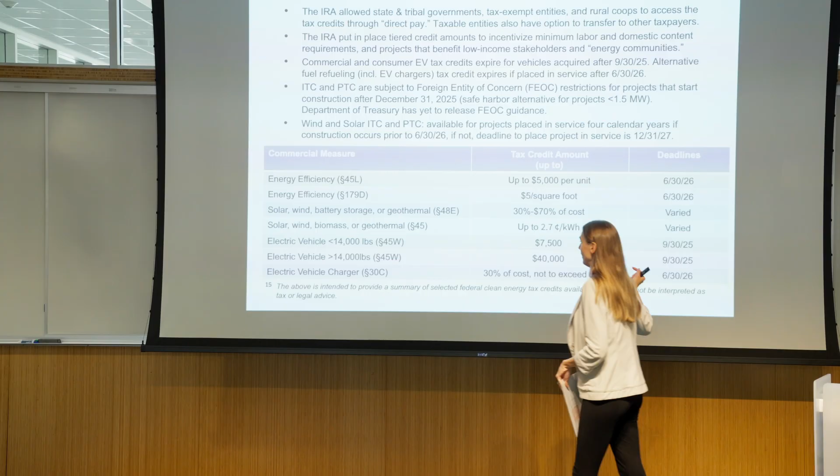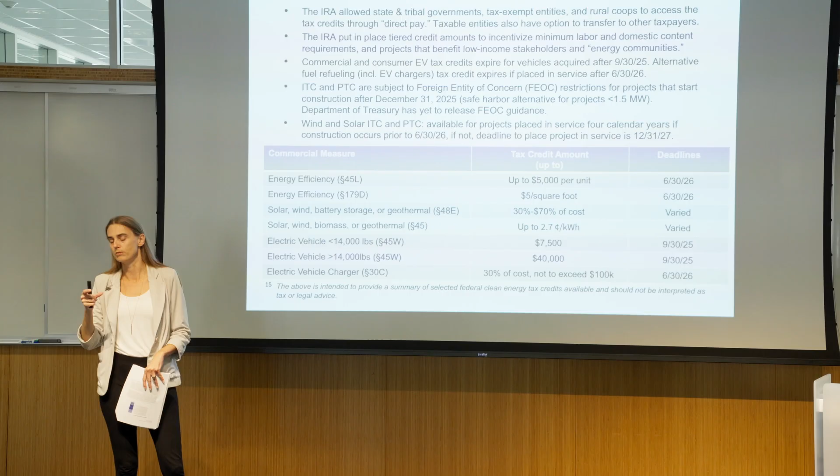And if you're under 1.5 megawatts, there's special requirements where you don't necessarily need to physically start construction. All you have to do is purchase at least 5% of the value of your project. Say, you purchase 5% of the equipment, the panels, and then you'll have 4 years after that to place it in service and still qualify for the tax credit.

That's one of the strategies that we're actually pursuing right now with our partner Capital Good Fund, that's a solar lease provider: making an equipment purchase by the end of the year to safe harbor a bunch of residential and other commercial rooftop solar projects so that they are not subject to the FEOC requirements, and we've got 4 years to place them in service. Although I imagine we're going to be placing them in service much sooner than that because of the significant demand that we're seeing. These tax credits will come up a lot throughout the year.

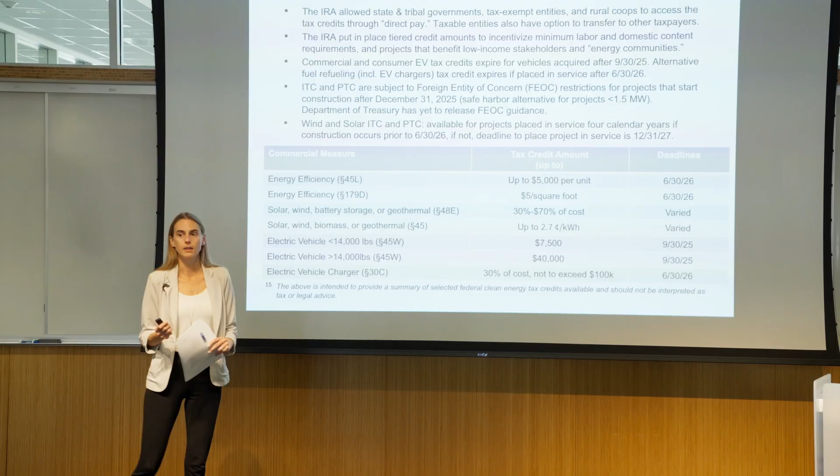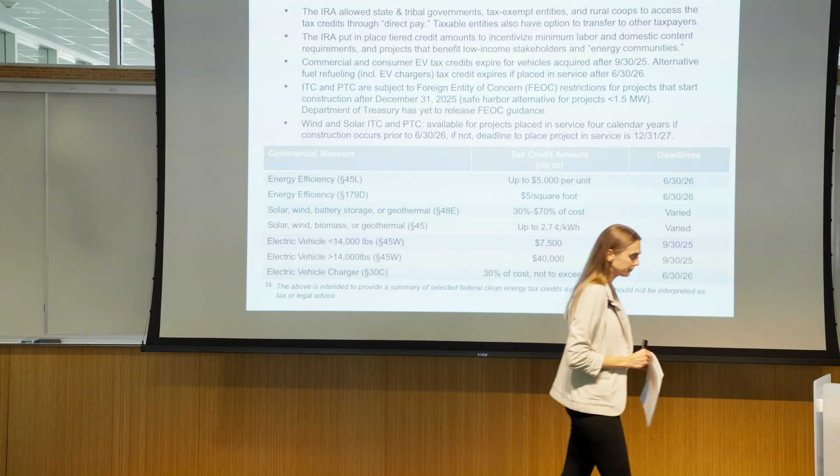Maybe one thing that I didn't mention, an investment tax credit is structured as covering a portion of your project cost, right? So like 30% of your project cost can be offset with the tax credit. For a production tax credit, it's in a dollar per megawatt hour structure. So if you're a wind project, you might get $23 a megawatt hour from the production tax credit. And historically, the production tax credit was available to wind, the investment tax credit to solar, but the IRA changed that and made them both available to any resource; the project could pick.

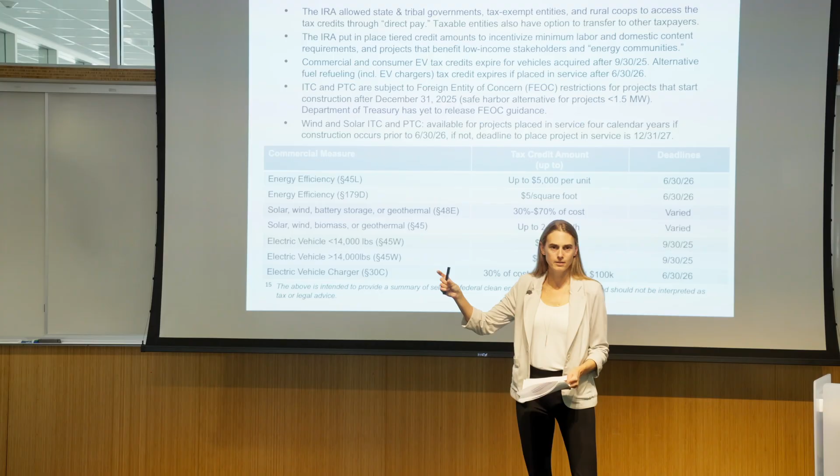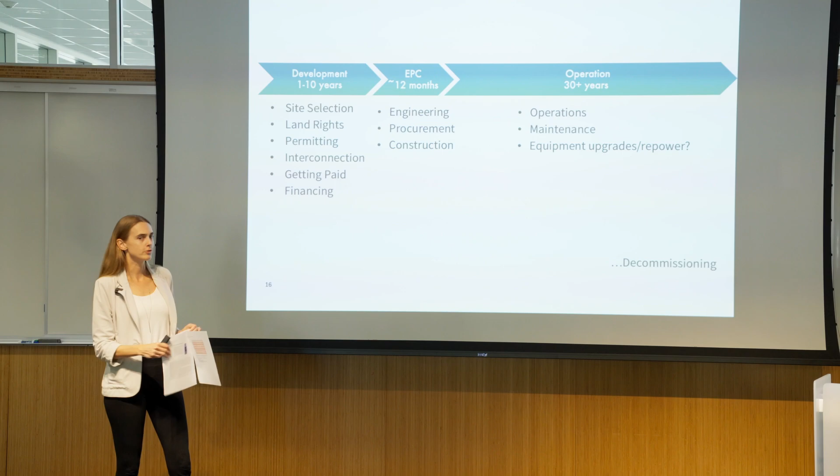You can imagine that an ITC is better for high CapEx projects, right? Projects that cost more to build. And as a general rule of thumb, there are always exceptions, but the PTC is better for projects that have higher productivity. Okay, so that's the renewable energy project development life cycle.